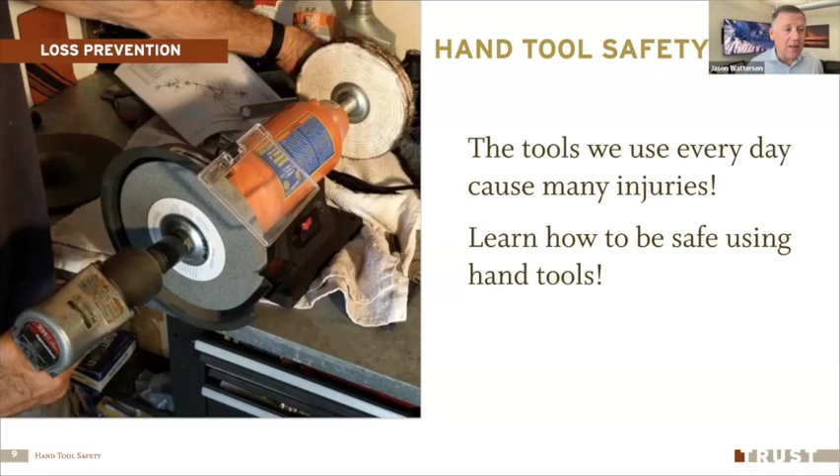Tools are around us every day, and any of us can be injured. Take a look at your hands. Got any band-aids there? Any marks or scars? We've probably all had a run-in with one of these hand tools over the years. Let's talk about how we can be safe with those things, and remember what those simple safety rules are.

All right, so safety first. Know the tool, know what it is, know what it's supposed to be used for, how it's supposed to be used, and what the hazards are. What is the proper personal protective equipment? I remember reading the first time I ever saw a sticker on a screwdriver that said wear your PPE, wear safety glasses with this. I thought that was pretty silly until I realized a few things about tools.

They're not always used exactly how they were intended, and there's a potential that a screwdriver gets used as a chisel or a pry bar or something like that. Not the right way to use it, and I'm not advocating that—I'm telling you not to do that. But you better have your safety glasses on when you're using even something as simple as a screwdriver.

Other simple things: keep your hair tied back, keep your jewelry enclosed or don't wear it at all. Keep clothing items out of the way where they could get wrapped up. Back to that jewelry stuff—don't have chains or necklaces hanging out that could get wrapped up. As a safety guy, I don't wear any jewelry. I've seen far too many injuries involving jewelry, so if I'm anywhere around a tool, for sure I don't have it. But just as a standard practice, I don't wear that stuff.

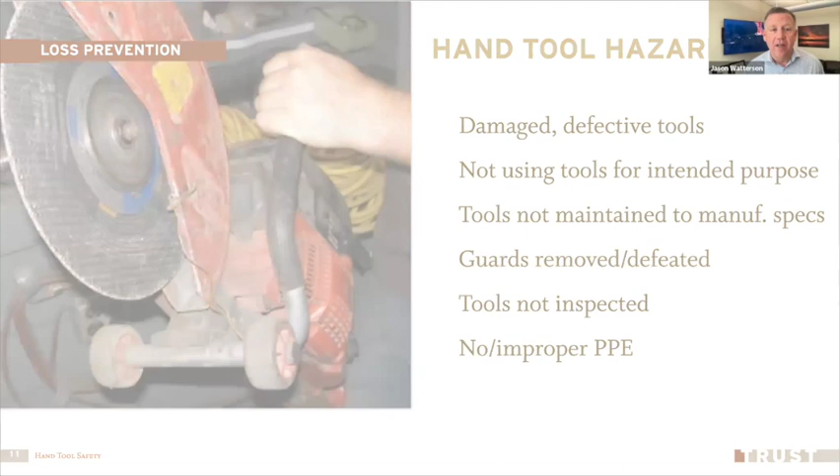All right, how do injuries and accidents happen with hand tools? Well, the hazards are pretty common. You may be able to walk out into your shop, wherever you have your tools, and find some of these right now. Tools can be damaged or defective. Sometimes we buy cheap stuff that doesn't really fit the bill, gets damaged, and doesn't do the job. Not using the tool for its intended purpose, like using that screwdriver as a chisel. Tools not maintained to the manufacturer's specifications, not keeping the guards in place, not using it only as the manufacturer intends, and not inspecting our tools or using proper personal protective equipment—these are all hazards that can cause us injury or accident when dealing with those types of tools.

Other hazards we may not think about are that tools can make dust, fumes, vapors, and gases, and also shoot out sparks and flying chips that can damage our eyes. But those gases and dusts can injure our lungs or respiratory system—they can actually be fatal. Things like crystalline silica, things like asbestos, when we pull out that demo saw and start cutting concrete or cutting a piece of pipe that has asbestos in it.

That could actually contribute to the end of our life because of breathing in that kind of dust.

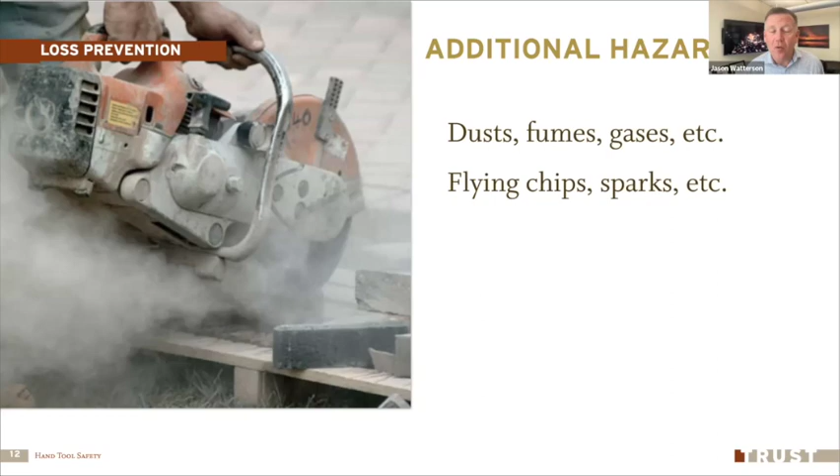All right, personal protective equipment. Make sure you're always using safety glasses. That's the most basic form of personal protective equipment, and also the most important in my mind. Whatever type of injury you have out there, you can lose fingers, you can lose even some pretty major parts of your body, or lose certain abilities. But if you can't see, that really diminishes your life. So always have those safety glasses with you and use them.

Make sure that tool is in good shape, it's accessible, I know where to find it, and it's in good condition. Buy good quality tools. Now, I've been known to buy a cheap tool here and there, and most times when I do that, I pay the price. They're not as good, they're not as safe as a tool that's maybe a little higher in price. So when it comes down to my personal safety, it's definitely worth it to buy a good quality tool that's intended for the job we're looking at.

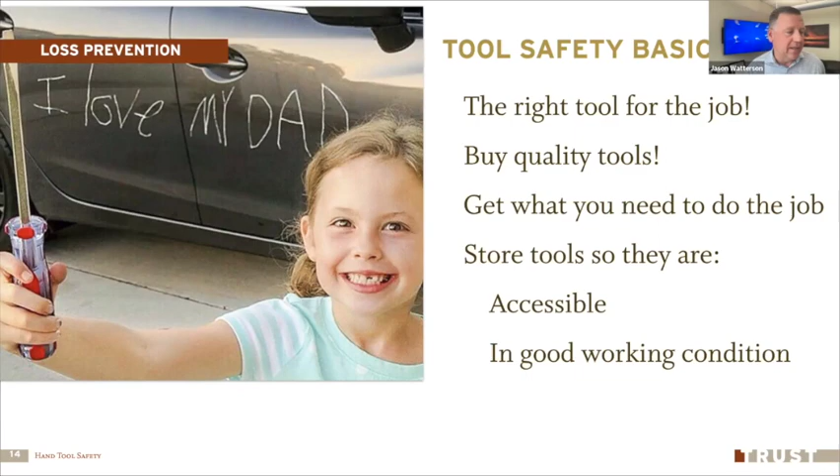A few other rules when it comes to hand tools. Don't use cheater bars. If I can't get that bolt to break free with the breaker bar or the ratchet I have, don't put a pipe on it to get a little more leverage. Get a different tool. Get the appropriate tool to do that job.

Know what the limits are for your tool. Some of those will be very specific, like a jack will actually say the load limit that I can lift with it. Others have to be maybe a manufacturer's requirement, or something I just got to be smart about - this is a little beyond what I can do with this tool, or this is an inappropriate use for it. If a tool is damaged, throw it away, and you may even want to destroy it, so it doesn't get picked out of the dumpster by somebody who just can't let that damaged tool go away. We don't want a broken tool hanging around, because somebody may get injured with it, so get rid of it.

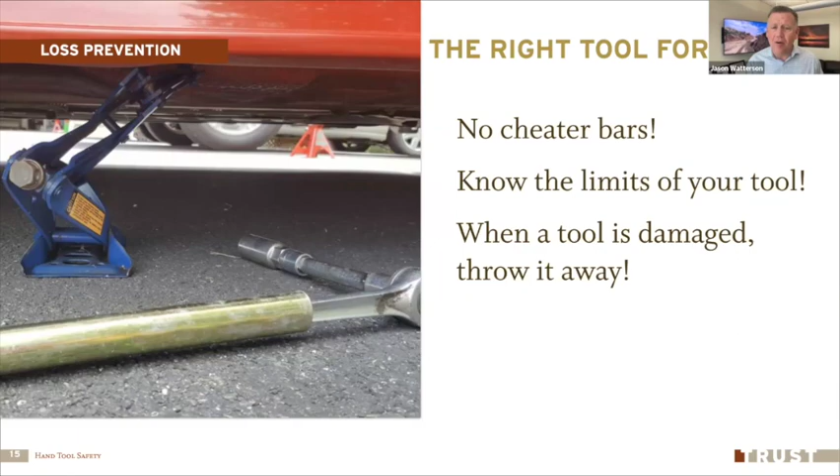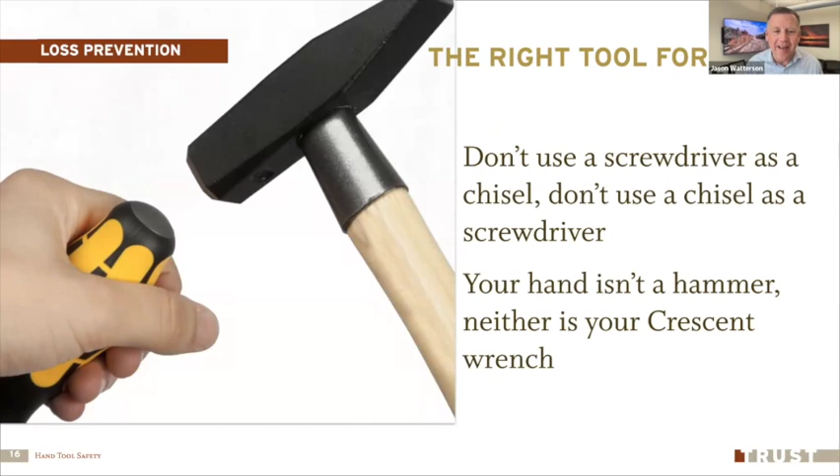All right, using the appropriate tool for the job. Once again, don't use your screwdriver as a chisel, or your chisel as a screwdriver. Your hand is not a hammer - I tell that to my kids over and over again as I see them pounding on things. Your hand is not a hammer, and your hand will thank you if you don't use it as a hammer. Neither is your Crescent wrench or those other tools that you have. Make sure we're using it appropriate for the job.

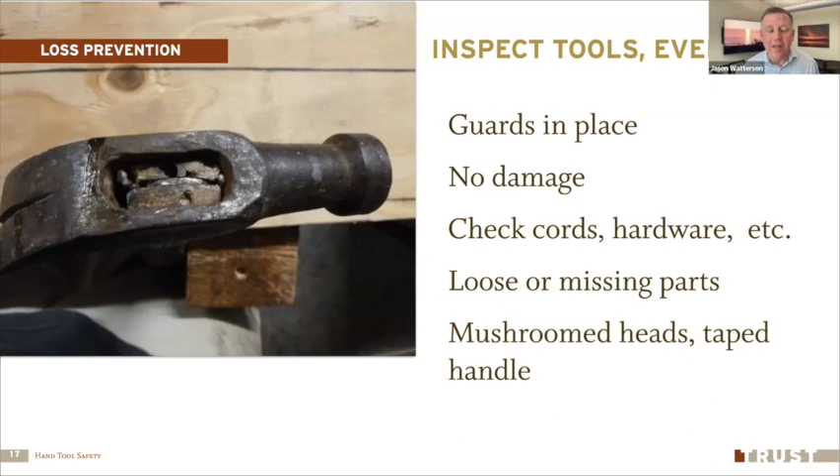Inspect your tools every time. Make sure the guards are there, make sure it's not damaged. If I've got an electrical piece of equipment that has a cord on it, check that the insulation isn't damaged, make sure that third prong is on the plug. If it's an air tool, make sure the hoses are in good shape, and look for loose or missing parts. For tools that get damaged as we're using them, like a chisel, the head starts getting mushroomed - tune those up, grind those off and keep those safe. If there's tape on the handle of a tool or on a cord, that means there's a problem, and I need to take that tool out of service and figure out what's going on.

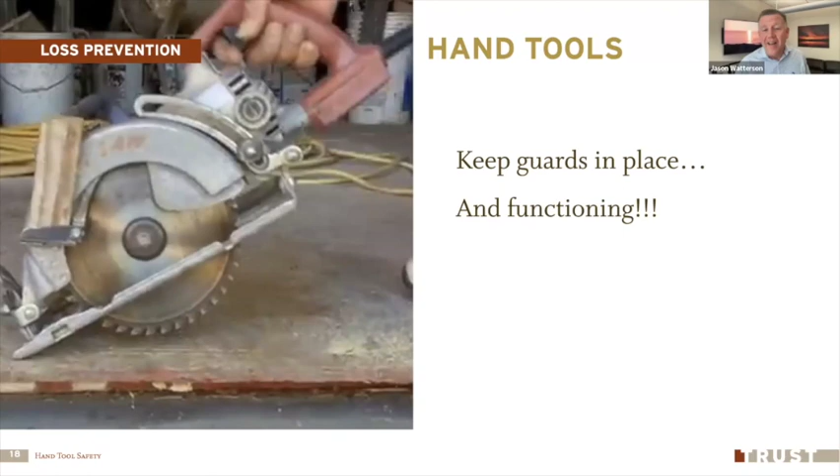Either repair a damaged tool or dispose of it. Keep those guards in place. You can see in this picture somebody has cut a wedge of wood and put it in to hold the guard open on this circular saw. That could be a real bad awakening if I forget that I did that and bounce that blade against my leg, or set it down on the deck and it takes off and hurts somebody else.

Just a few other rules. A sharp tool is a safe tool. Now that may seem a little counterintuitive to some people out there. Well, it's a sharp tool, it could cut me. Yeah, that's true, but it'll also do its job the way it was intended. A sharp tool will perform that task, whereas a dull tool may take more effort. It may slip, it may be inconsistent.

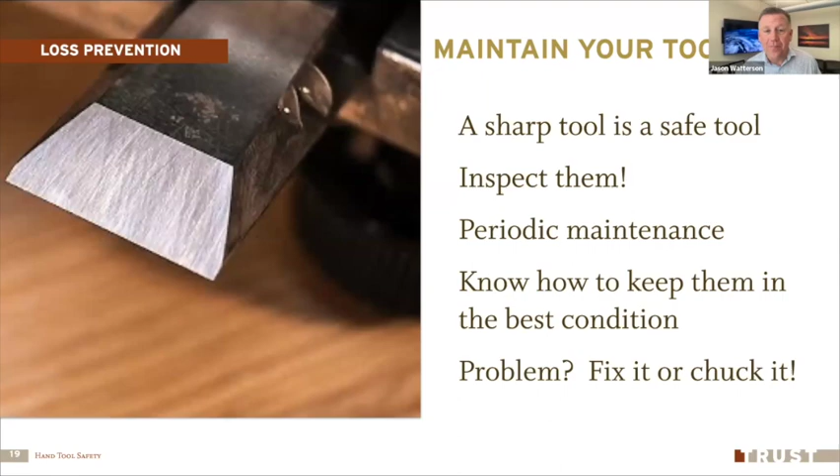So make sure that our tools are in the condition they should be used. Inspect every time, do periodic maintenance. Some things need to be checked and repaired, just like the head on a hammer needs to be checked periodically to make sure it's tight and not going to dislodge from the handle. Once again, if there's a problem, throw it away. Let's get rid of those things.

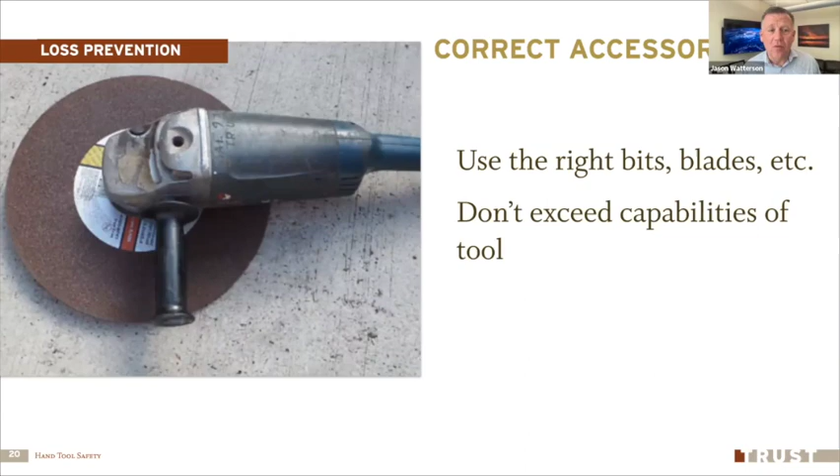Use the appropriate accessories that go along with that tool. If I've got an angle grinder, don't put on a grinding disc that is too big for it. Chances are the RPM, the revolutions per minute rating on that grinding disc, isn't the same as for the tool itself. If I over-rotate that disc, it can fly to pieces and cause me to get hit with shrapnel. There have been fatal injuries that have happened from just that, where those sharp parts come back and cut somebody's throat or other parts of their body, or they lose eyes.

So use the appropriate accessories for the job. And remember, keep your toes out of the way when you're using those tools.

Don't carry tools in your pockets. If I put a screwdriver or a pair of scissors in my back pocket and forget it's there, I may sit on it, I may slip and fall. However it happens, I may end up with an injury I don't want to explain to anybody. We have tool belts for a reason, that's for carrying those tools. So if I've got to carry tools around, put them in a tool belt. Keep your hands clean and your gloves as well, and that'll prevent slipping and getting injured by that tool.

Don't carry a tool by its cord or the hose connected to it. It has a handle for a reason. Carry the sharp part down. Don't walk around with that sharp part pointing out to where others or yourself could be injured.

Keep your finger off the trigger, just the same as with a firearm. Only have your finger on the trigger when you're ready to use that tool. Put yourself in a good position to be safe. Have good footing and balance, don't put yourself in an awkward location.

When you're done with that tool, clean it up and put it away where everybody else knows where it's supposed to be, and it'll be there the next time you're looking for it. Let people at the work site know what you're doing. Let them know what's up - I'm going to be doing this job, I'm going to be grinding on something, there's going to be sparks flying around, or whatever the job may be. Let people know what's coming up and keep them out of harm's way.

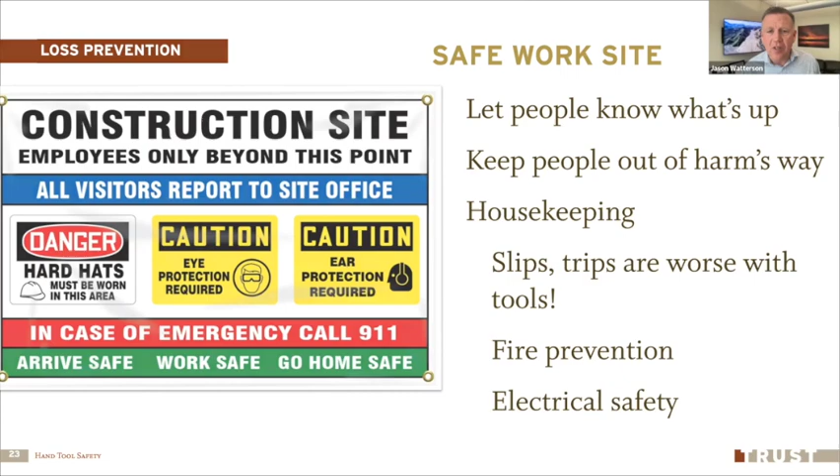Don't have flammable materials around when using a grinder. Don't use things that potentially could be combustible around these tools. Also look for electrical safety hazards, and we'll talk a little bit more about that in a couple of minutes when we discuss portable powered tools.

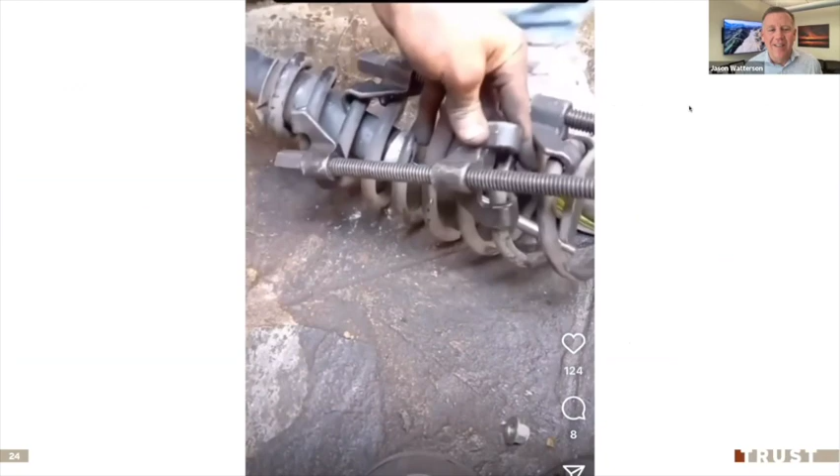Remember, there are other things that can be a hazard to us as well, like spring tension. This poor guy, ouch, that would really hurt.

Basic hand tools. Here's some other rules that we have on files. Files are a great tool, but they're only intended to be used for one thing. They need to have a handle on them. Files are not sold with a handle in place, we put that on after. The handle is a reusable part, something we keep using over and over, and when the file wears out, we put it away or throw it away.

Files aren't for prying or hammering. They're made of really hard steel, and when that gets struck, it can shatter and shoot out razor sharp pieces of metal that can cut you or put your eye out. So use those only the way they're supposed to be used.

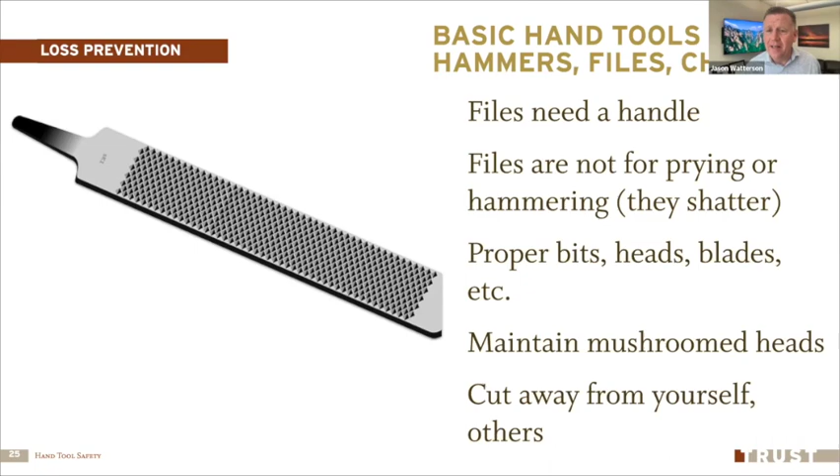Cut away from yourself, cut away from other people. Pretty simple rule, but it's one that we see happen quite often, where people will be using a box knife or razor knife, cutting a zip tie, and end up slicing their hand or arm open because they were cutting towards themselves.

Air tools - whoops, excuse me, I'm looking ahead a little bit. Jacks and hydraulic equipment are important tools as well. They are rated for lifting a certain capacity, don't ever exceed that. When you're working under a vehicle or under a load, those loads need to be blocked up by jack stands or other appropriate cribbing adequate for the weight we're looking at.

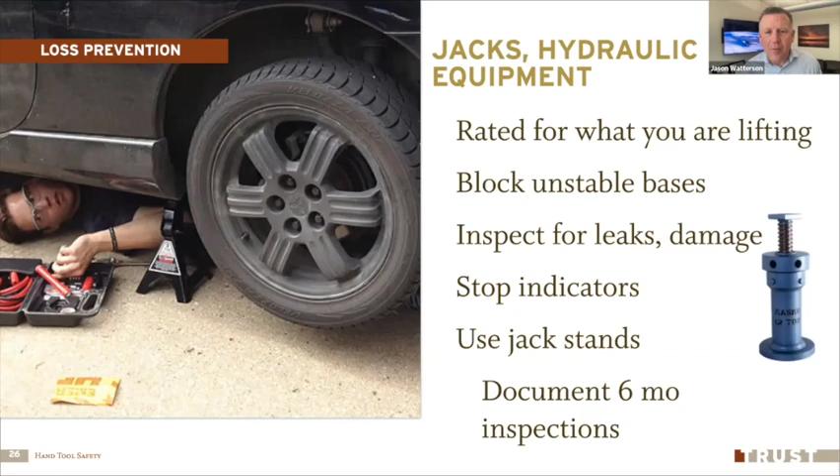Use the jack to lift it up, then use the jack stand to hold it in place. Those jack stands should have stop indicators so I don't raise it up too high. And we also need to document inspections of those every 6 months. That's one of those OSHA standards that a lot of people don't really remember about.

Air tools have the potential of having pressure cause injury to us. If you take an air nozzle that isn't equipped with a blow-by device - you can see in this picture that nozzle has some holes in it, that's to allow air to blow by. So if I happen to deadhead that, which you shouldn't do, don't ever put that nozzle up against your skin, because it could penetrate and cause an embolism, which could even kill you if it gets into your bloodstream.

If I happen to deadhead that against my body, these holes would keep the pressure below 30 psi, and that's really the limit. I can have higher psi in my system, pounds per square inch, but I've got to have those blow-bys there. So go out in the shop today and take a look.

Most of these little nozzles will have that blow-by on them, but I have a suspicion there may be a few out there that have been modified with a longer nozzle so they can blow out radiators and things that are hard to reach, and chances are those don't have those blow-bys on them. So take a look at those today.

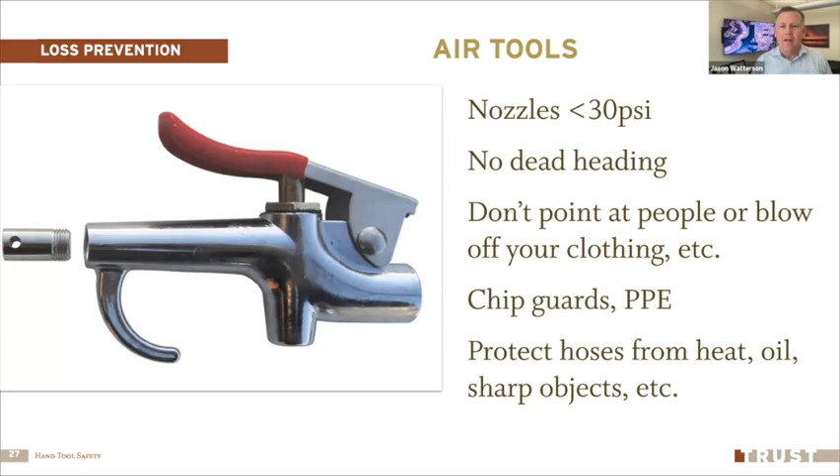Make sure all of our air equipment is securely connected. Don't use hose clamps to put these things on, there are dedicated ways to put this equipment in place or hook fittings onto those. Retainer clips should be installed on air chisels and things like that, so it doesn't allow those to fly out. Meet the pressure requirements for each tool that you're using.

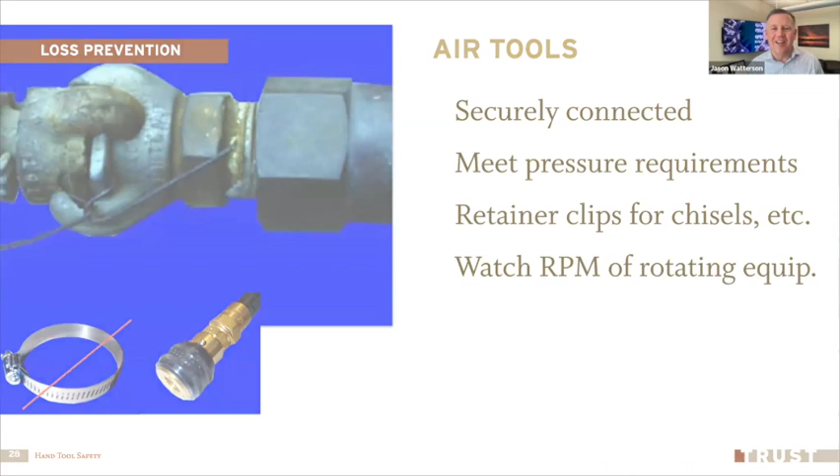And once again, remember, watch the RPM rating of the tool and the wheel, or whatever tool you're using to grind or cut, and never exceed that rating. Okay, I'm going to warn you here before I switch to the next slide - if you have a problem with gory stuff, it's not too bad, but I'm going to talk about nail guns. So warning, look away for a minute. These are one of those great tools that make us much more efficient.

But boy, if we don't use them right, we can have some really nasty injuries here, like you can see in this picture. Keep your safeties in place. That means that there's a safety switch on the tip that has to be depressed before it will allow that nail gun to discharge a nail.

Don't point it at people. Disconnect that when not in use. When you're changing out, putting in new nails, you should disconnect that hose. Know what's on the other side of the substrate I'm working on. If I'm nailing a wall, make sure I know what's there. It may be people, it may be electrical, it may be pipes. Any one of those could make for a really bad day if I don't pay attention to it.

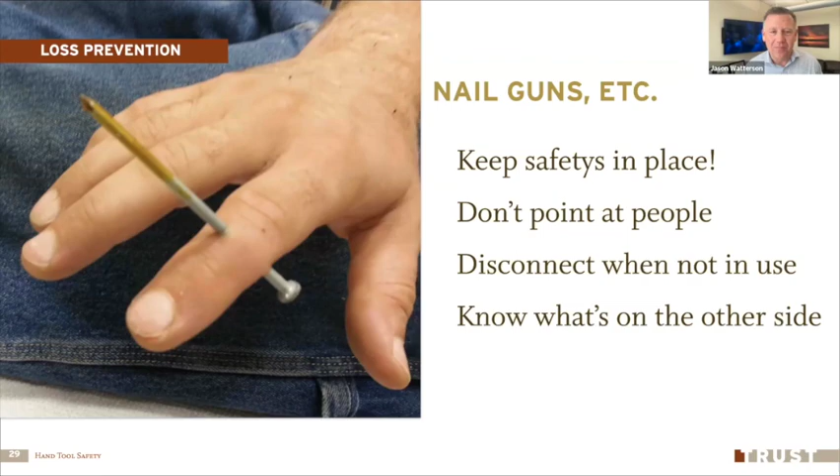They make our lives so much easier. I've been amazed as I have seen the improvements, particularly in the battery operated, cordless tools, and how much torque they have. They are awesome tools, and I enjoy using these things, but they also have plenty of potential danger as well. So let's talk about how we stay safe using powered hand tools.

One of those is every time before I use it, I'm going to inspect it. Inspect the cords. Don't ever carry the tool by the cord, or by the hose if it's an air tool. Make sure it's properly grounded, has that third prong on it.

Those old drills, you may have one hanging around out in the shop that's got a metal case on it. I know they're great old tools and they're torquey, but they may electrocute you. They're not what we call double insulated. Take those out of service and let's get a tool that does have those protections.

Keep the cords away from heat, oil, sharp objects, things that can damage it. If I'm working in wet areas, I need to have a GFCI, or ground fault circuit interrupter.

What the heck does that mean? Well, it's like in your bathroom. If you happen to drop the hair dryer into a sink full of water, it's the thing that pops in that outlet and doesn't allow electricity to keep flowing.

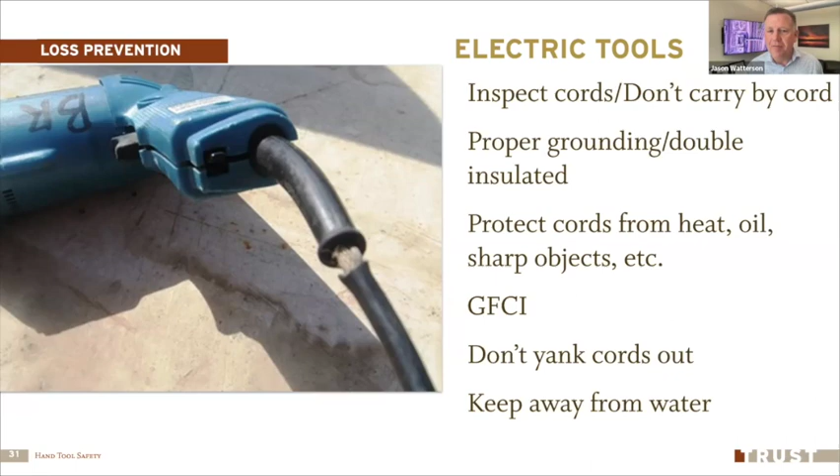Don't yank on cords. Make sure you grab them by the handle. That protects that insulation and it doesn't get separated that way. Keep this stuff away from water. We don't want to get shocked.

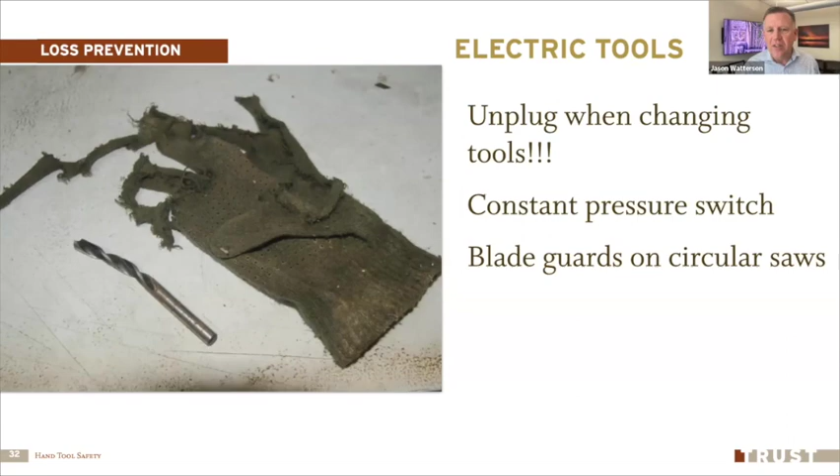Electrical tools, and unplug when you're charging up these cordless tools. Where do I store and where do I charge my cordless tools? Well, there's some pretty significant risk to those battery operated tools.

So make sure that they are stored in an area that's free from combustibles. I don't want a fire to get away from me if we do happen to have that. So your charging area should be free of any combustibles. Watch for heat so we don't overheat those things.

Well, it's far more dangerous than some of the old batteries that we've had, because those lithium ions can, especially if they're exposed to water, catch on fire and explode. And so we've got to watch for those things.

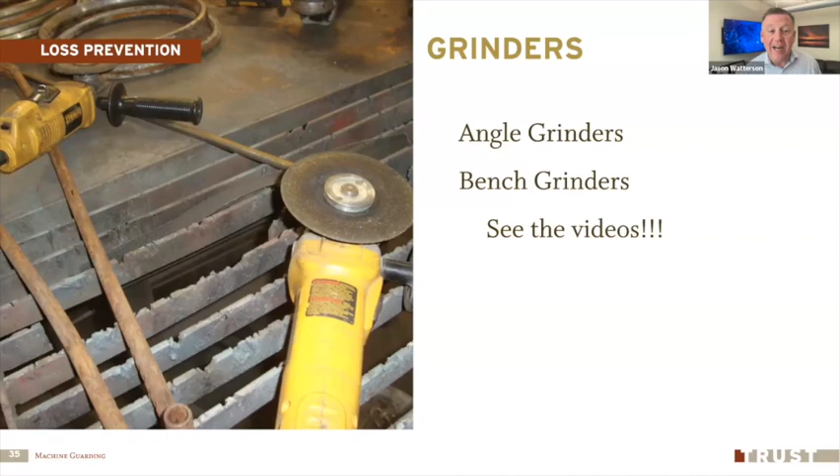Just a couple of things on hand grinders, those angle grinders. Keep that guard in place. That's one of the first things a lot of people do is yank that guard off. It's there to protect you. Some people complain, well, I can't use the tool, it won't do what I need with the guard in place. Most of the time that's because they don't understand how the guard is designed. It's designed to rotate around that wheel, and you can put it in the location that allows you to do the job the way you need to.

Don't ever use damaged wheels on these things. If you drop it and it damages that wheel at all, take it off and replace it. They are a consumable part of the tool. Just throw away those damaged ones, because they will fly apart and hurt you. Make sure they're the right size, the correct RPM rating, and the right material for the job. Don't use a cutting disc to grind things. Don't use a grinding disc to cut things.

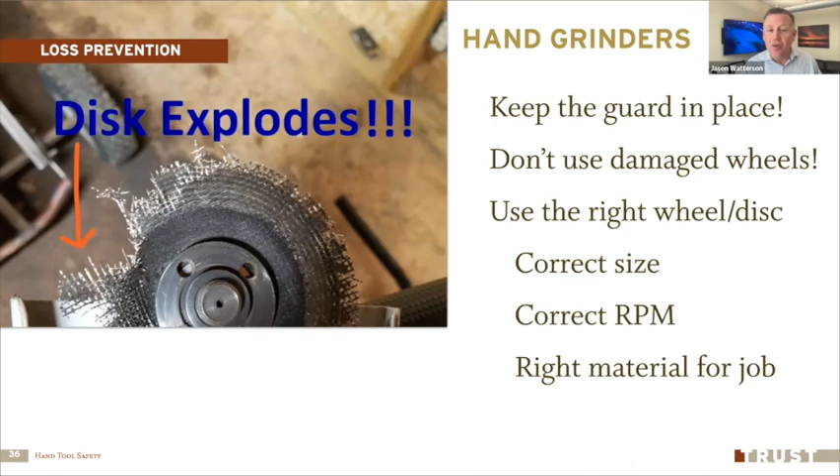Gas operated tools have an extra level of hazard because they have a motor running and they're releasing carbon monoxide. That's a really toxic material, and we had a really scary situation. It wasn't a hand tool, it was actually part of the heating system of a building, and we had multiple people get injured with carbon monoxide poisoning. That's how easy it can happen, if you start up a tool inside a confined area, you can get enough carbon monoxide to make you sick or kill you in not very many minutes, even sometimes seconds.

So fuel handling: make sure we're using approved OSHA safety cans, and that we eliminate ignition sources from the area when we're dispensing that fuel, and make sure when we're using anything that has a spark that I have fire extinguishers and I've done my fire prevention. And above that, we recommend that you have a hot work program.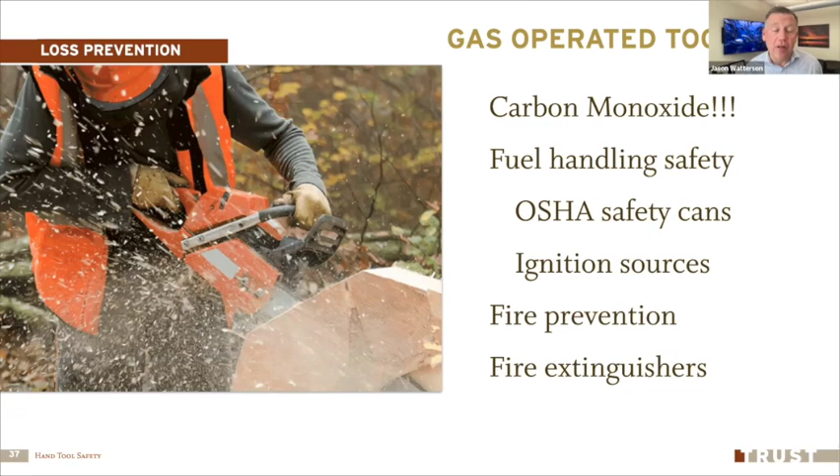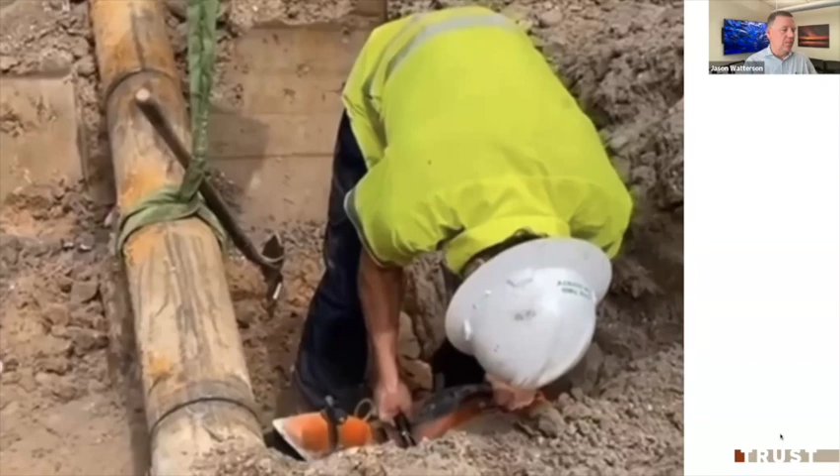And I'll just do one more. These are those OSHA safety cans, and I'm going to let this video play for just a second, just as a reminder.

On these demo or cutoff saws, and the danger that we have with those: we had two near fatal injuries in the last year from kickbacks or other challenges with these tools. Make sure that you're paying attention. We have a webinar on that Mike did a little while ago, probably a link somewhere, watch that one. If you're using these tools, use a better alternative. There are a lot of cases where there's a better option than using this type of tool. These are great for some things, but they're just dangerous.

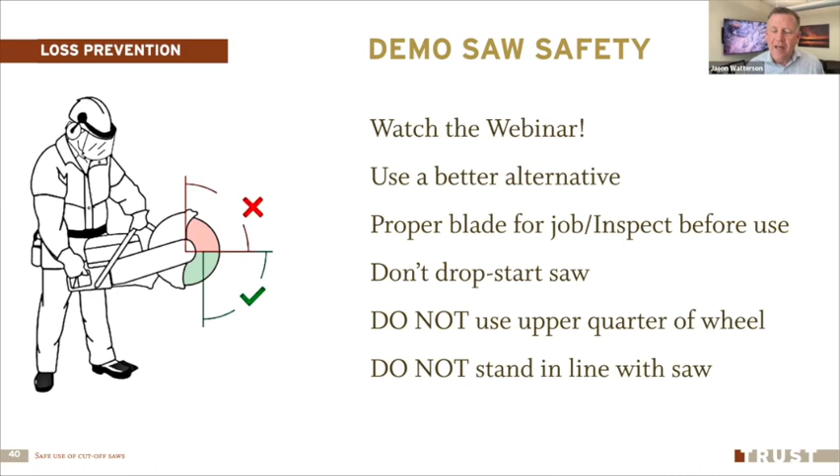Tools are awesome. Some of my possessions that I prize the most are tools. I like those things, and they've made my life much better. But they also have a great potential to cause us a lot of harm if we're not smart about how we use those. So just remember, some of these basic tools, keep that tool in good condition, inspect it every time before you use it. If there's a problem with it, either fix it or throw the thing away. That will help us stay safe when we're out there doing our jobs.